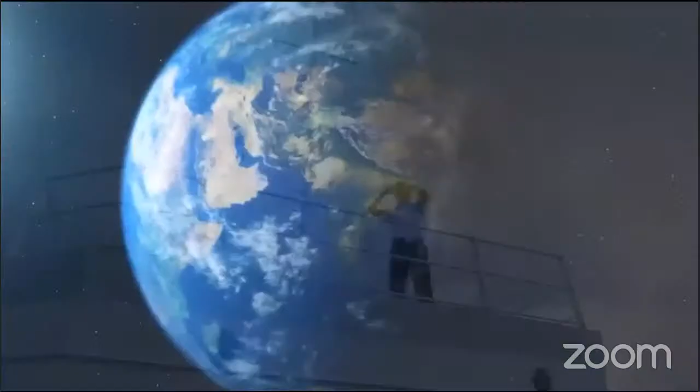The sea might be as violent as it can be, the water infinite, and the waves intimidating. But all this becomes insignificant when a mariner dons his uniform. Conquering the high seas is no mean feat. Only those with a mighty heart and a steely resolve can accomplish that. Such extraordinary seafarers are made in Tolani Maritime Institute, located in Induri at Talegaon near Pune.

The sprawling 100-acre campus is an endeavor by the Tolani Group with an illustrious tradition of establishing and managing higher education institutions. Dr. N.P. Tolani, Chairman, Tolani Group of Companies and founder of Tolani Maritime Institute, strongly believes in higher education and its advantages. He credits his father for encouraging him to provide higher education in the country. I got the bug of education from my father, and it has continued ever since.

Our vision at TMI is to be the preferred maritime education and training provider in the industry, meeting the highest global standards. This institute is one of the largest maritime educational centers, offering Grade 1 rated marine engineering and nautical science degree programs, postgraduate programs and other courses in collaboration with foreign universities as well. The degree courses are approved by the Directorate General of Shipping, Government of India, MLIT, Japan and MPA, Singapore.

The BTech Marine Engineering, BSc Nautical Science degrees and the Diploma in Nautical Science are presented by the esteemed Indian Maritime University. There are hosts of other short-term courses like Electro-Technical Officers course, Command and Control course, and other safety-related courses. At TMI, our focus is to achieve excellence in shipping and maritime techniques. But what makes this possible and what creates world-class mariners? It is the holistic impact of the state-of-the-art campus and the overall infrastructure that renders the Institute matchless.

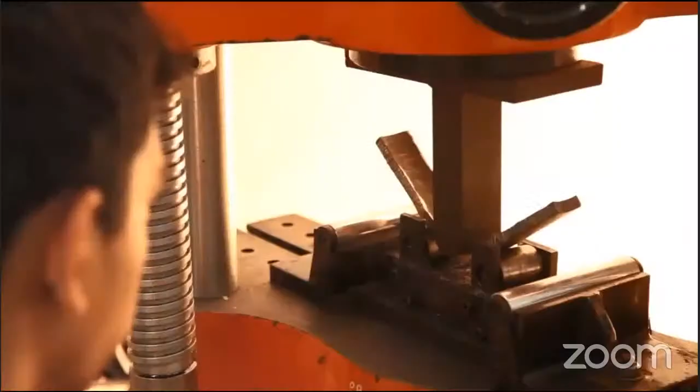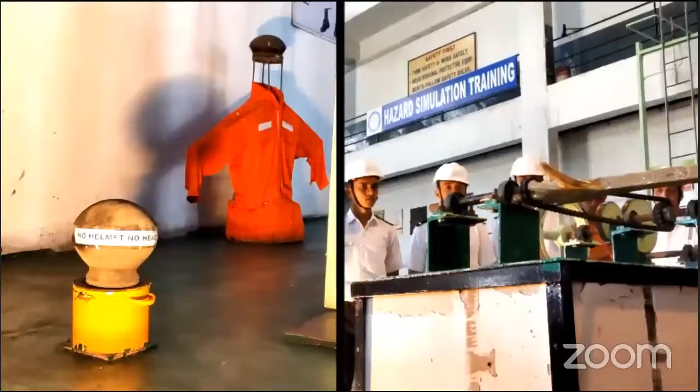This is an Equal Opportunity Institute. The students are offered merit and need-cum-merit scholarships worth over $160,000 per year. Additionally, many shipping companies also offer merit-based scholarships. As a student and an aspiring mariner, this is the most amazing and apt place I could have been. But the linking bridge between all these elements of the Institute and the students is the faculty.

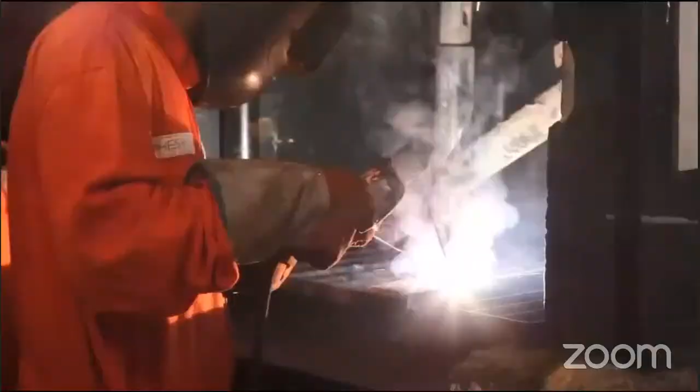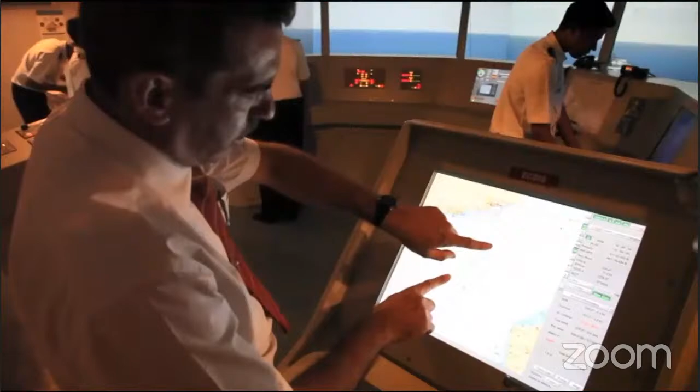The values that we imbibe here are attitude, skill and knowledge, that is ASK at TMI. These values along with safety come together to create successful mariners. The skilled and experienced faculty at Tolani Maritime Institute is the guiding light for the proud future mariners.

The courses we offer at TMI for the undergraduate programs allow the students to identify, explore, and understand areas where his or her true passion lies, the exciting profession of seafaring. The professional and qualified full-time faculty leaves no stone unturned to instill pride, integrity, determination, humbleness, and in-depth knowledge about shipping and maritime operations in the would-be marine officers. After all, it takes more than just the love for swimming to make you equal when the sea presents its worst.

TMI has a glorious legacy of training the brightest aspiring seafarers. But why do students go through these 4 years of grueling training? To tame the seas and for admiration, respect and honor which come with donning the uniform adorned with stars. It is a job worth toiling for. Some of these students go on to become the guardians of India's formidable coastline.

The innovative internship cum placements program at the Institute gives its students an edge over the others. The recruiting companies have no second thoughts on hiring students from the Institute. A majority of students enjoy permanent employment with some of the top-notch national and international shipping companies. I believe that this is where the bright future of shipping and maritime industry in India is assured.

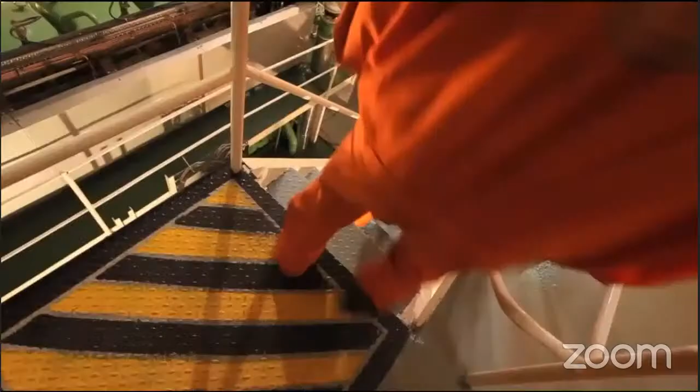The journey, though, definitely does not end here. It is still a long way to go, and they have to prove their mettle. The canvas is huge, the battle challenging. It has been rightly said that you can never cross the ocean unless you have the courage to lose sight of the shore. That will surely not be a tough task for graduates from this institute. They have the strong foundation of training at one of the best maritime institutes in India. Any ocean, any ship is easy to fathom when your alma mater is Tolani Maritime Institute.

Every single time we as cadets see glances of our campus, we start missing being there even more so. Truly, the rich legacy of our college, the foundational strength coming from the common culture followed at TMI, the culture of attitude, skill, and knowledge has made our institute stand out and a source of delivering quality marine officers.

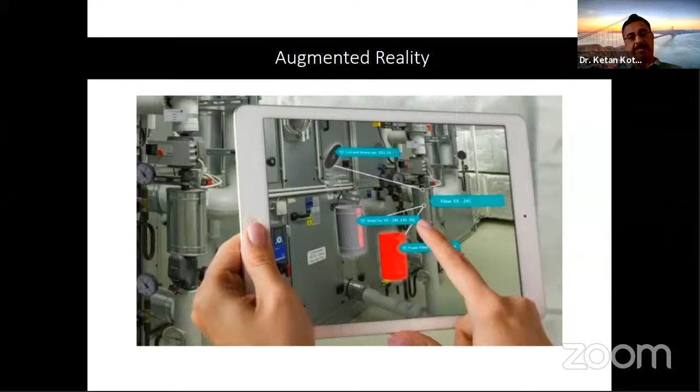Even people are talking about digital twin. Whatever you do in the plant, there is a simulation available, so that in simulation you can do a lot of control mechanism as well. For example, your ship is moving in the physical world, but there is a clone of that ship in a virtual world as well. And in the virtual world, you can do a lot of experimentation on that particular ship, and you can do some predictive maintenance or predictive analysis, so you can know a priori what is going to happen to your ship. So that is not difficult now, and that is an application of AI for digital twin, right? So I'm sure you will learn that maybe in the final year or some advanced courses in your BTech program as well.

Manufacturing, there's a huge usage. Once I was seeing the video of your institute, very, very impressive video. I could see that there is a lot of scope for predictive maintenance. Because your ship can go wrong, maybe because of wear and tear, and there are a lot of other possible problems. You can predict those problems a priori by putting sensors all across the ship and finding out that after 15 days, this particular problem is going to happen. So planned maintenance can be done. That is a huge advantage of doing so. I'm sure you will prevent disasters as well using that.

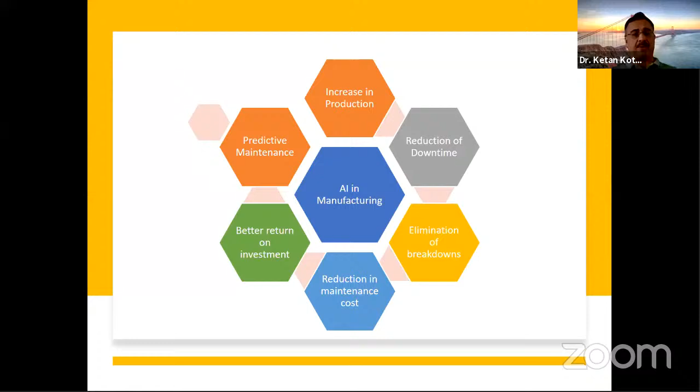So I see that there's a huge potential of applying AI for predictive maintenance in your ship or otherwise, right? And there are so many other directions in which you can apply AI to increase the production, to increase the supply chain. I think supply chain is also one of the important areas you may be working upon. So there also is a huge usage of AI. I was telling about generative design, that this particular design is indigenously produced by an AI algorithm by giving only the constraints, and it is an optimized design. It's found to be the most optimal design based on the constraints which are given, right? Or seat brackets are found automatically by the computer algorithms, which is an example of deep learning.

Healthcare, it is used in predictive analytics. Any particular disease before it happens, before it affects the person, or remaining useful life prediction. In a lot of places AI is used in healthcare, and it is the need of the day because doctors are less. I'm not telling that it's going to replace the healthcare workers, but it is definitely a helping hand to the doctors so that it can increase the efficiency. There are a lot of cases where very difficult surgeries are done by robots. A virtual nursing assistant can do the job of an actual nurse. At least 90% of the work can be done.

And a lot of other things in AI in healthcare as well. I'm sure everyone knows this particular picture, the most popular picture which Google has developed. By scanning the retina of a particular person, in just 5 seconds, you can find out 6 parameters of a particular person. His BMI, his sex, smoking habits, age, everything.

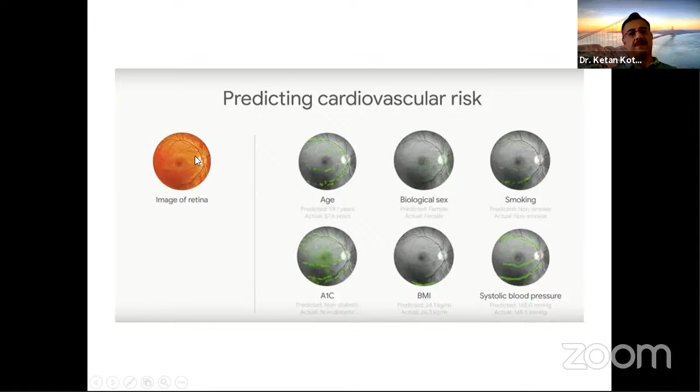By taking just a picture of the retina of any person in the world. So this particular project Google has developed in Bangalore by taking a lot of data of Indian people and then sold that particular machine back to Bangalore. And this can also predict the cardiovascular risk of a particular person by just scanning the retina. So that much is the power of convolutional neural networks. That's what I'm trying to tell.

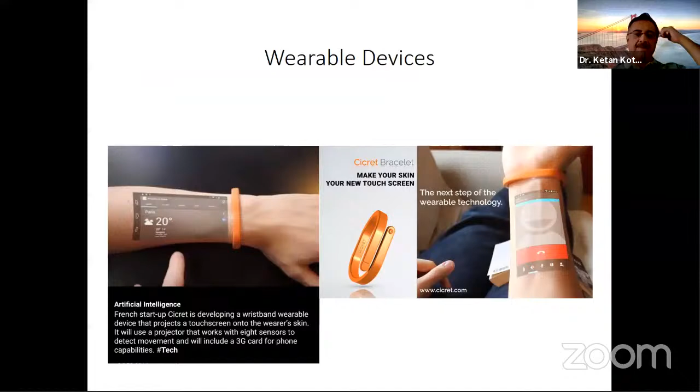I'm sure you know this car manufacturer, Porsche, and they are now into making robots which can do surgery as well. There is no exaggeration in the slides. Whatever is available right now, I am trying to tell that this much is the power of artificial intelligence. Wearable devices, I'm sure, are nothing new now, which definitely use a lot of AI.

In Stanford University, they have used AI to find out the solar flares. They predict it very well. This paper is published in Nature, and it's a very, very important finding from Stanford University.

There is a band which is developed, which is of AI, completely autonomous. If you are in another room, you can't find out that there are no human beings playing the band. And that's a test of AI, the Turing test, where you should not be able to find out that there are no human beings there. So that is also AI.

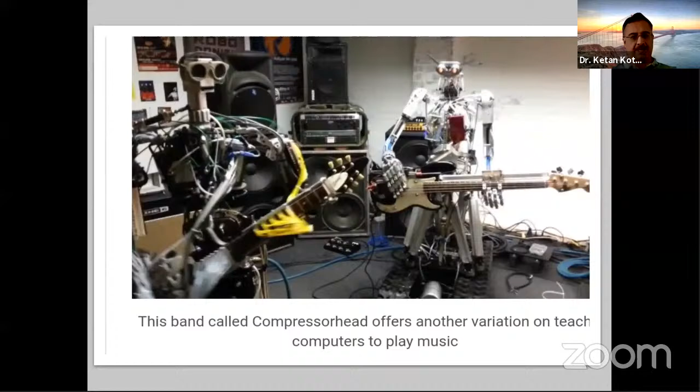So I'm not trying to give you the application per se for your domain, but a very general view of where AI has been used, so that you can think and find out where you want to use AI for a particular domain.

Agriculture, I gave an example of McDonald's, but in every facet of agriculture it has been used. Health monitoring of a particular crop, irrigation schedule, crop classification, crop yield, or disease detection. Just on a mobile phone, you move on a particular farm, take photographs and find out whether there is any disease coming up, so that you can use pesticides and preventive mechanisms for that particular disease. That is easily possible right now.

Readiness of the crop is possible. I have even seen that if there is a huge stack of wheat, you take a photograph and find out how many kgs of wheat are there. There is no need to weigh it. So that is easily possible. It's a very simple application of AI which is used for agriculture.

This is an indigenous work, and it is possible. You can try it also. You just search on Alex Graves. He's a student of Toronto University. He has developed this particular application, which is available to try as well. What is his application? Because he's a student, he has written a lot of notes, and he trained the AI algorithm on those particular notes.

After that, he speaks in front of a computer and the computer types, which is not difficult, which is very simple. Right now also we don't type for WhatsApp, you just speak. But the beauty here is the handwriting. These particular fonts are not available in any editor. This is his own handwriting, created by a computer. There is absolutely no exaggeration here. This handwriting style was totally captured by a deep learning algorithm.

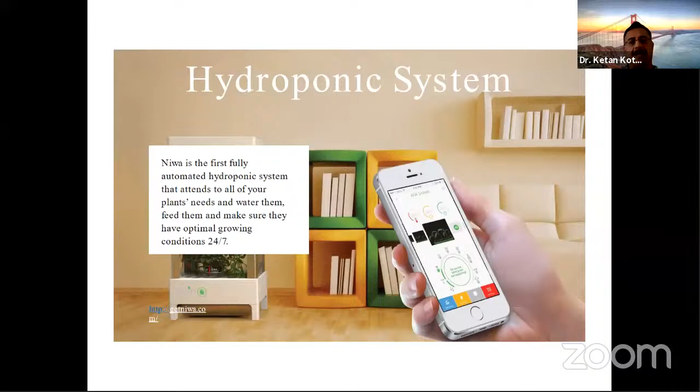Smart hydroponic system - if you have an indoor plant, you can completely control it using an AI algorithm. Smart sprinkler control - based on the soil, moisture, and weather conditions, your lawn will be kept green through continuous controlling done by the AI algorithm. Smart home security - I'm sure everyone knows this, and it is in high demand right now.

Very similar to Anil Kumble's Academy - if you want to learn this particular game, how to swing your bat, how fast, in which direction, and what kind of ball is coming, everything is taught and analyzed, and you can learn.

Smart sleep system - I'm sure everyone is using Fitbit to track how well you slept last night. Then there's the smart cooker, so you don't need to control how many whistles or the exact cooking time, it stops automatically. That is also an AI application.

Again, keeping with the tradition of Anil Kumble's cricket bat, if you want to learn tennis, this tennis racket comes with a lot of AI inside, and after you play the game, it analyzes your entire game and suggests that this is not the way you should have played, this is the better way to play. So it's completely automated using a cell phone and a smart racket.

Smart bike - it analyzes everything, we use it all the time now. Smart door lock, smart socks - it analyzes a lot of things about you once you walk or trek. And the last one is the smart t-shirt, which gives you your exercise schedule, calories burned, and so many other things.

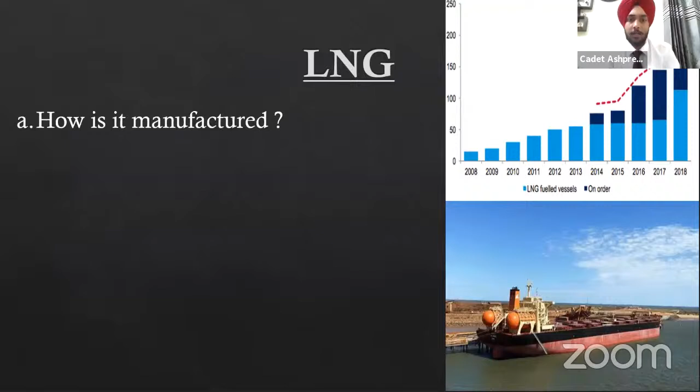Number one on the list is liquefied natural gas. How is it manufactured? It is manufactured by cooling the hydrocarbons to about minus 160 degrees Celsius, and then it is made useful for fuel consumption. But here's a limitation associated with it: the methane slip. When LNG is used as fuel and burned, a small amount of methane is emitted into the atmosphere.

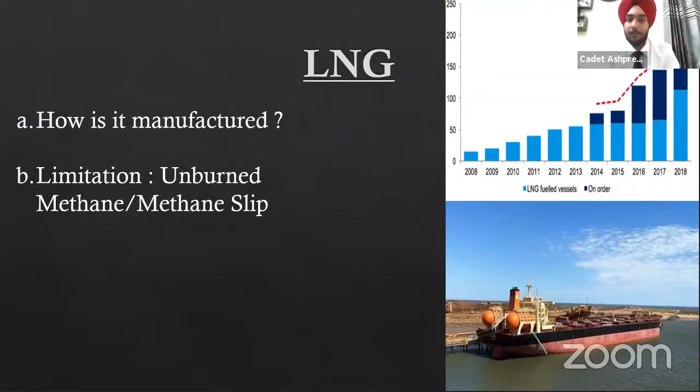This is very dangerous because as per the IMO report, a 151% increase in methane was seen when LNG fuel vessels started sailing. But as we know, the European Union has introduced a cap of 0.5%, also capped by the IMO. So this fuel has its advantage as no such sulfur emission is there by this fuel.

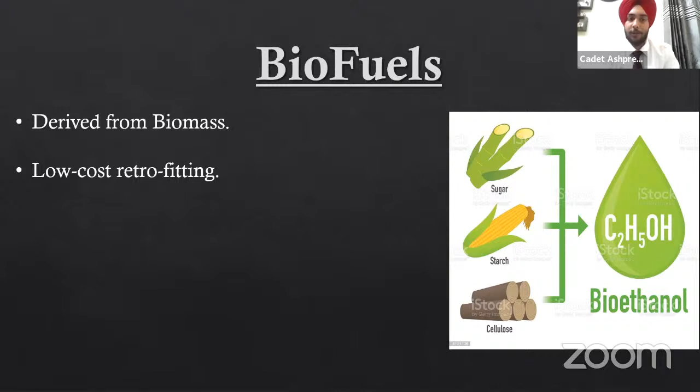The next on the list is biofuels. Biofuels, we all know, are derived from biomass. They require low cost retrofitting of engines. As we know LNG requires an expensive cost of retrofitting, but in biofuels we do not require so expensive a cost of retrofitting the engines.

The limitation associated is inflation and environment contamination. There's a debate that if biofuel is introduced in the marine industry, crops will be grown more for biofuel rather than for food, so there will be an increase in food prices. Also, crops will be grown with the help of fertilizers, so environment contamination through nitrogen is also evident. And the demand cannot be met fully—biofuels need hybridization, as only 20 to 30% of demand can be met through biofuels.

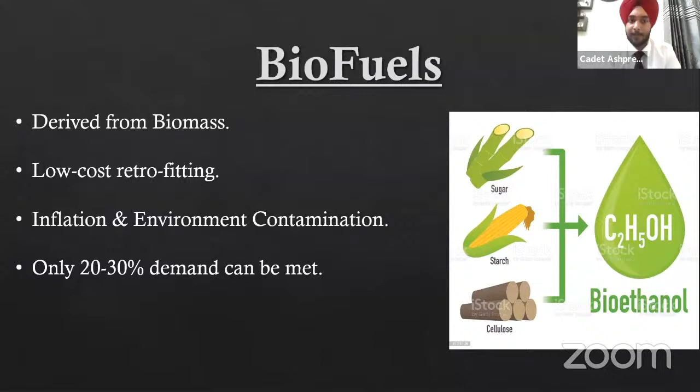The next one is ship electrification. I would say this is a zero emission fuel. This fuel is viable only for shorter transits. The reason behind this is electrification is either achieved by weighted batteries or by a thing known as fuel cells. If more and more weighted batteries are added to the ship, the cargo carrying capacity of the ship will get reduced, so ship owners will face losses. So this fuel is viable only for shorter transits.

Fuel cells are basically cells which convert liquefied hydrogen into electricity through electrochemical processes. Again, these fuel cells require hydrogen, and hydrogen is a gas with more volume, requiring large tanks for storage, again reducing the cargo carrying capacity of the ship. And also hydrogen is not readily available, so this fuel can be termed expensive too.

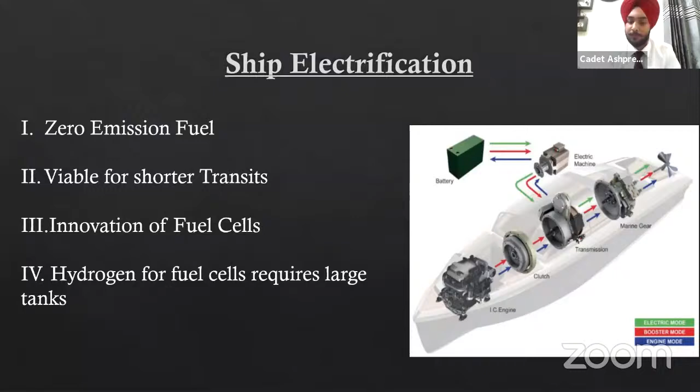The next one is nuclear propulsion, the most controversial fuel. There might be a doubt that this fuel can be used for manufacturing weapons, that it can be misused. But I must tell you that low enriched nuclear fuel is used, which is not at all fit for manufacturing weapons. This fuel produces massive energy, so it is viable for longer transits.

As you can see in this picture, this is an icebreaker ship. These ships have been utilizing this fuel since decades because they require massive energy for crushing through the ice, and they bunker after years. So nuclear propulsion is best fit for these ships.

We all know this fuel requires foolproof technology because gamma radiation leaks are disastrous. There have been incidents like the MV Mirai, in which a radiation leak occurred. And so many ports in the world are very apprehensive before calling nuclear fueled ships to their berths.

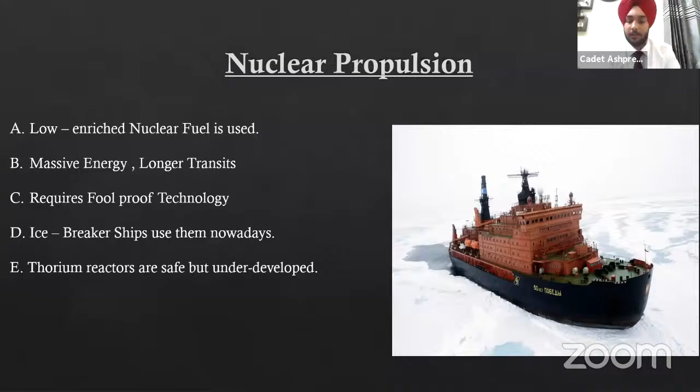And so our industry is also working towards thorium reactors. These are the reactors which are far safer than the uranium reactors because thorium reactors can do controlled reactions, and reactions can be controlled in these reactors to such a level that they can be stopped anytime. Also, the radioactive waste which is produced is short-lived and it is not so much as compared to the uranium reactors. The next one is the renewable energy.

Renewable energy, I would say it is technologically immature. As we all know, wind turbines are heavy, they are expensive, and also they produce a lot of noise. So I would say that the input is expensive, the equipment is expensive, and the output is less.

In the picture, you are seeing a Maersk ship, Maersk Pelican. An experiment of rotor sails was done on this ship. Rotor sails are basically long vertical axis mounted towers, and they utilize the Magnus effect to propel the ship. The Magnus effect is that a forward thrust is created, and the ship is propelled forward with the help of the wind. This experiment was successful and it also attracted international attention.

The next one, solar energy. It is very clear solar energy can produce very little output, so it is not at all viable to be used by these ships. And the last one on the list is the liquid and the gaseous fuels. These fuels are the fuels of hybridization. By this, I mean that none of these fuels can be used except in conjunction with the primary fuel. So hybridization is very necessary if the liquid and gaseous fuels are to be used to operate the ships.

Two of the fuels which I have identified as of now are liquefied petroleum gas and dimethyl ether. These are the two viable fuels that can be used by our industry. Dimethyl ether remains a bit unexplored, the reason being there are some limitations which have been identified. The first one, it has lower viscosity. Lower viscosity means it has a longer injection period.

Second one, it has lower combustion enthalpy. So there can be issues with leakage in the pipes, and also the lower modulus of elasticity. This can make us use greater compression pumps when we have to pump this fuel. So dimethyl ether needs a lot more exploration before being adopted as an alternative fuel.

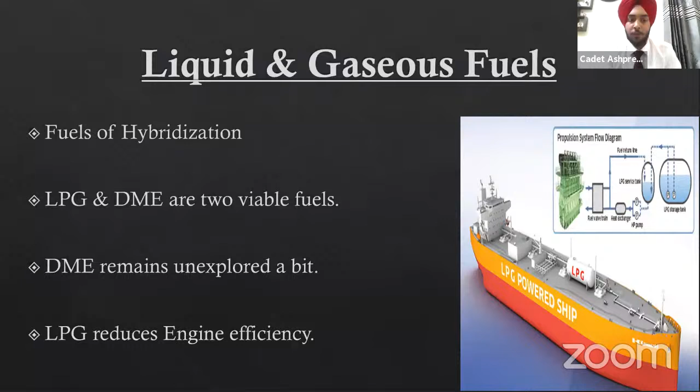And of course, LPG reduces engine efficiency. We all know in our cars also, LPG fuel when burnt leaves some residue. So this reduces engine efficiency. And now about the conclusion of the topic.

Cohesive international support. By this term, I mean that adoption of a new fuel is a tedious task. This fuel requires international support, the reason being only the developed countries, or only the countries which have emission control areas on their coastline or economic zones, are looking forward to these alternative fuels. But the international communities have to come in and also help the developing countries, because the merchant navy is a global profession.

So we have to... the countries or organizations like the UNFCCC, the organizations associated with the Paris Climate Change Agreement, they need to step in and support financially or by anything. This we need to support.

This is a 10 minutes reminder. This is a 10 minutes reminder for the presenter.

Continue. Hybridization is the need of the hour. I mean, without hybridization it cannot be achieved, because nuclear propulsion and liquefied natural gas were the only fuels which can be used without hybridization. All other fuels require hybridization because the demand cannot be met. And in my view, liquefied natural gas looks like the most viable alternative fuel.

With this, I mean that liquefied natural gas has been in use for about 10 years now. So many ships are using liquefied natural gas as their primary fuel. And so the cost of retrofitting, which was its limitation, is also being continuously reduced as more and more companies are stepping in to make LNG fueled engines.

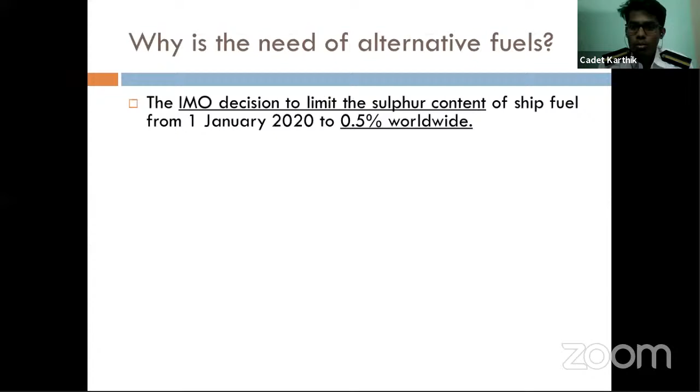So after all these advantages, what is it that makes the industry move towards alternative fuels? Let's see why there is the need for alternative fuels. First is the IMO decision to limit the sulfur content to 0.5% worldwide. Second is the recently adopted resolution to reduce greenhouse gases by 50%. This is adopted by IMO, and after reducing the SOx emission by bringing in regulation, there has been uptake of marine fuels such as MGO and MDO in the industry. But these fuels are low in sulfur content, but still are producing as much GHG, greenhouse gases.

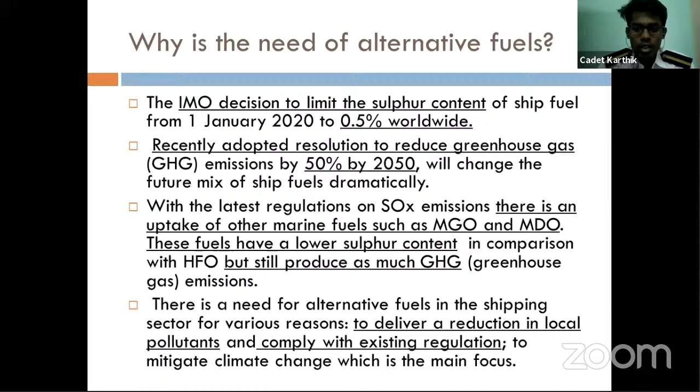And one more need for alternative fuel is to deliver a reduction in local pollutants and comply with the existing regulations. So now you know the need for alternative fuels is mainly to reduce the pollutants and comply with the existing regulations. So what is alternative fuel? Alternative fuel is a fuel which acts at least partly as a substitute for fossil oil sources, and which has the potential to contribute to decarbonization and enhance the environmental performance. It is not fully overtaking the fossil fuels, but can at least partly contribute to reducing emissions and to decarbonization. They include electricity, hydrogen, biofuels, synthetic paraffin, LNG, LPG, etc.

So come to the marine fuel challenges. What are the challenges we are facing with today's marine fuel? We have sulfur reductions. We know that most marine fuels have a high sulfur content, and IMO has recently come up with regulations and amendments to reduce the sulfur content from 3.5 to 0.5%. And talking about NOx reduction, NOx reduction is also a major challenge, although we can reduce it with systems like SCR and EGR systems. And CO2 reduction. CO2 is nothing but greenhouse gases. IMO estimates that it may rise by 50 to 250% by the year 2050 if no actions are taken.

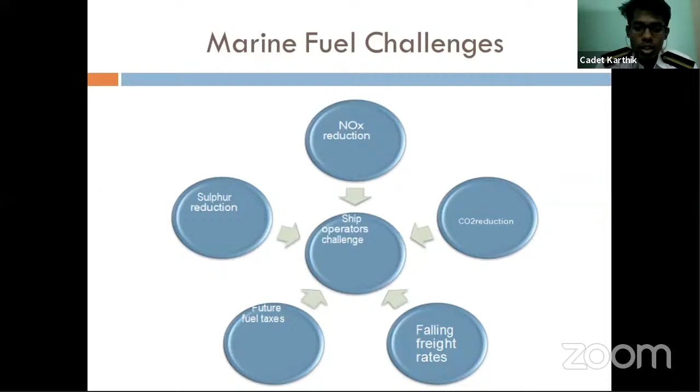Talking about future fuel taxes, as we know, HFO and other marine fuels are fossil fuels, and they can deplete over the years. So their taxes and prices may increase with the reduction of their reserves in the world. And falling freight rates. Falling freight rates are a major headache for ship owners, because demand for goods traveling by shipping is going to increase, but at the same time fuel prices will also increase. So there will be a great loss to the ship owners.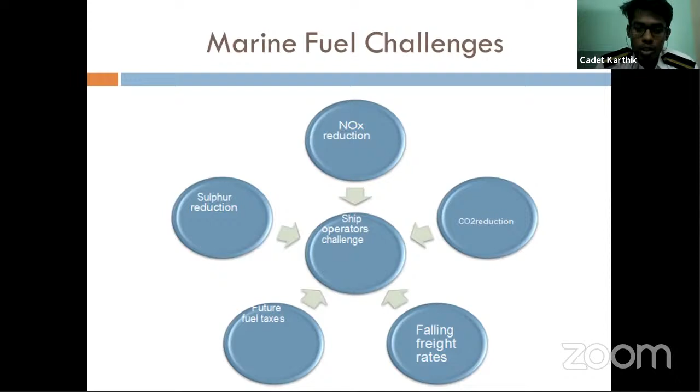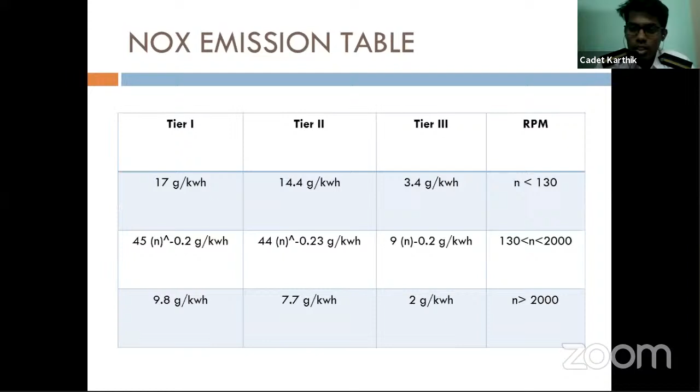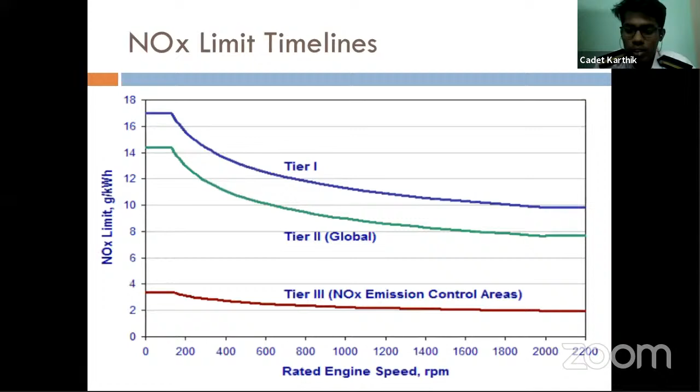New technologies. Among the proposed alternative fuels for shipping, DNVGL has identified LNG, LPG, methanol, biofuel, and hydrogen fuel as the most promising solutions, and they can be said to be replacements as alternative fuels. Fuel cell systems for ships are under development, but will take time to reach a level of maturity sufficient for substituting main engines.

In order to be an alternative fuel, it should complete these following demands. So for a marine fuel to be a fuel of the future, it needs to comply with the fuel triangle. So this is a fuel triangle given by DNVGL. So it must comply with high energy density. So a fuel must have a high energy density.

The energy density of alternate fuel will need to be comparable with the existing marine fuels. The crucial element with regards to the energy density is the energy content per volume. If said energy content is smaller than the energy content of current marine fuels, cargo capacity will have to be reduced as more space will be needed for fuel storage.

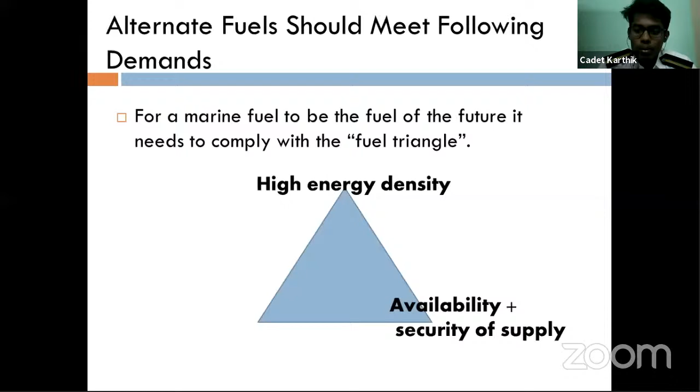Second is availability plus security of supply. So it is important that alternate fuels are easily available and they are easily supplied from one place to another. Because shipping is a worldwide industry, it should also be available worldwide. So proper infrastructure has to be built for that availability, and the fuel should be GHG neutral.

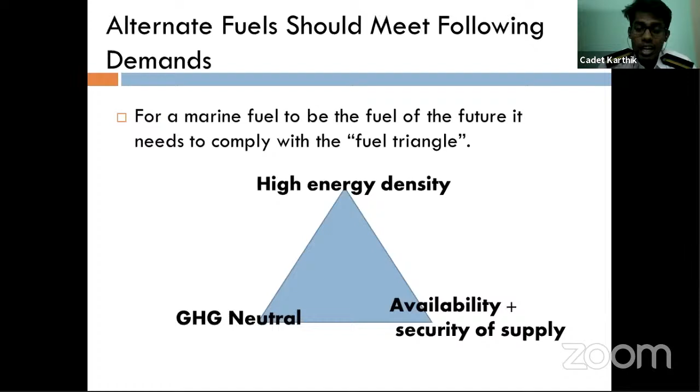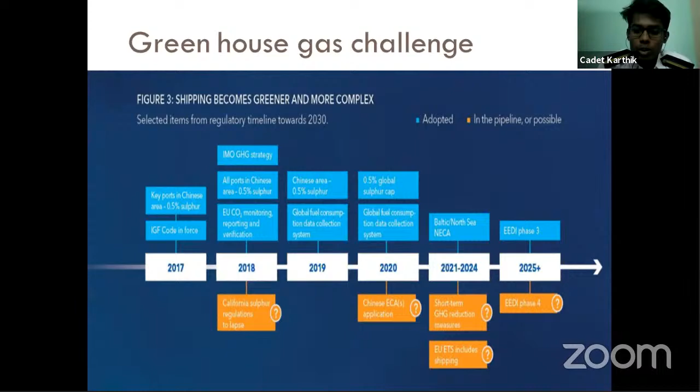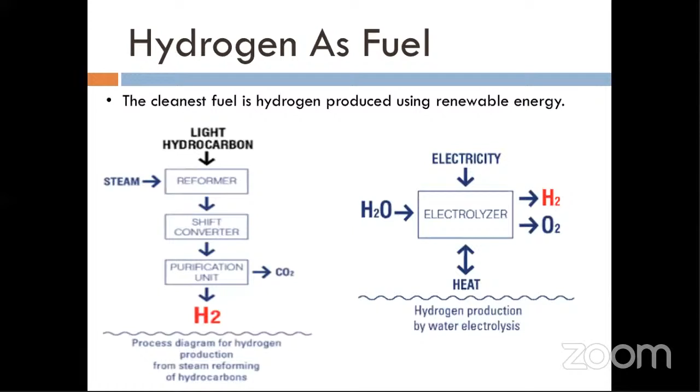This is the production, and the left hand side is the SMR method, and it is somewhat cheaper than the other methods. And the second one is the greener method, which only gives H2 and O2. But you can see on the left side it also produces CO2.

The two types of hydrogen use on ships need to be considered. Hydrogen dual fuel internal combustion engines can burn hydrogen with very low GHG emissions, and another one is fuel cell systems, which on the other hand use an electrochemical reaction to generate electricity. The efficiency of fuel cells is relatively high, at around 45%, compared to internal combustion engines.

Talking about the availability, it scores relatively well for hydrogen. A global supply network for hydrogen is present, but for worldwide availability, investments will be needed in renewable and hydrogen production infrastructures. But its disadvantage is very low energy density, so it requires large storage volumes to come into international deep sea shipping.

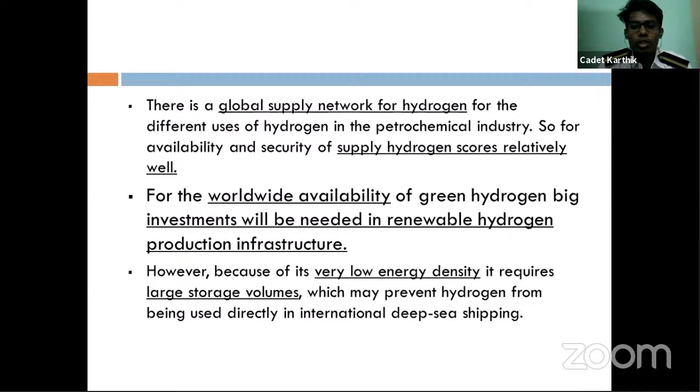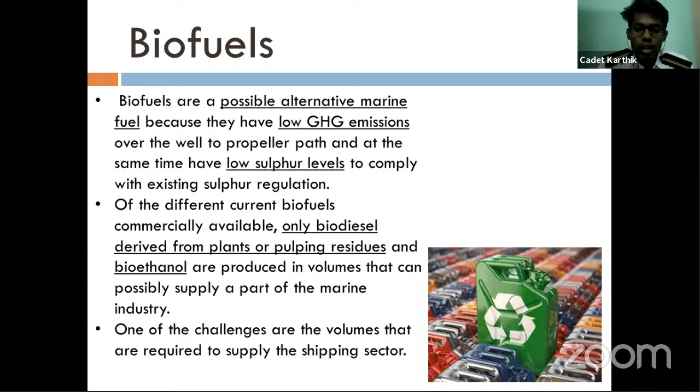Biofuels can be said to be a possible alternative marine fuel. They have low GHG emissions and low sulfur levels. There are a list of biofuels in the industry, but only biodiesel derived from plants or pulping residues and bioethanol are produced in volumes that can supply the marine industries. One of the challenges is the volume required, because a large amount of volume is needed to power the ships. Advantages are low SOx emission, safe to use, environment friendly, commercially available, cost competitive, marine is certified to burn biodiesel.

Your time is up. Your time is up. 12 minutes are passed by. Okay. So should I stop?

Please conclude. Okay. Conclusion is that there is no fuel that complies with the existing regulations on local pollutants, at the same time delivers a big reduction in greenhouse gas emissions, and is economically viable. LNG works perfect for existing regulation on local pollutants, but is not a low GHG fuel. Biofuel shows potential, but only if actual savings are realized, like fertilizer use needs to be accounted for.

Hydrogen, there is a barrier on transport and storage. Significant efforts will be required first to demonstrate applicability in practice and subsequently to be scaled up to the industrial level when talking about long-term lifetimes of ship and fuel supply infrastructure. Thank you.

Okay, thank you. This has taken 12 minutes and 52 seconds. 12 minutes and 52 seconds. Okay. Thank you, Mr. Karthik. Okay, you have done a good job. You have taken review of so many alternative fuels. Okay, so based on your presentation, first of all, I'll request judges to ask a few questions.

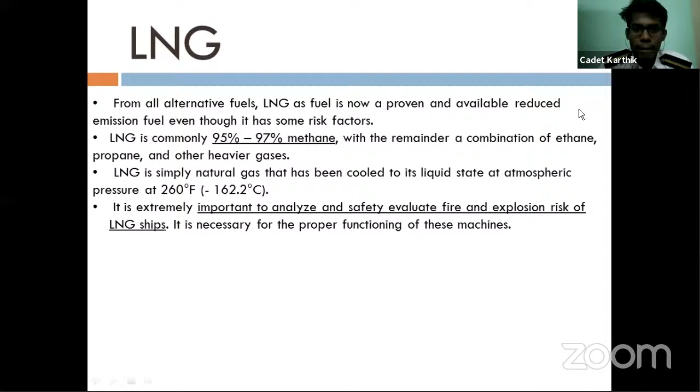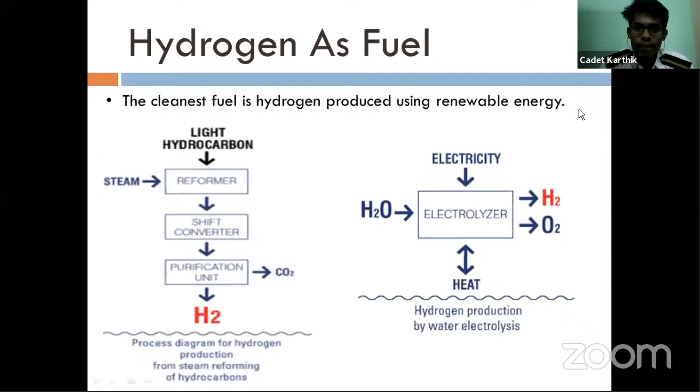So does it include even methane slip? You had mentioned even with methane slip, the total LNG is much better. Its emissions are much less, even with whatever methane slip is happening. You mentioned that in the paper. Do you remember that? Do you agree to that?

Yes, sir. Methane slip is actually a greenhouse gas. It is the unburned methane which is released in the atmosphere, but it is actually a greenhouse gas and has a global warming potential 25 times higher than CO2. So I think, according to the emissions, it is comparatively less than HFO, and it can be used as an alternative. Good answer. Thank you.

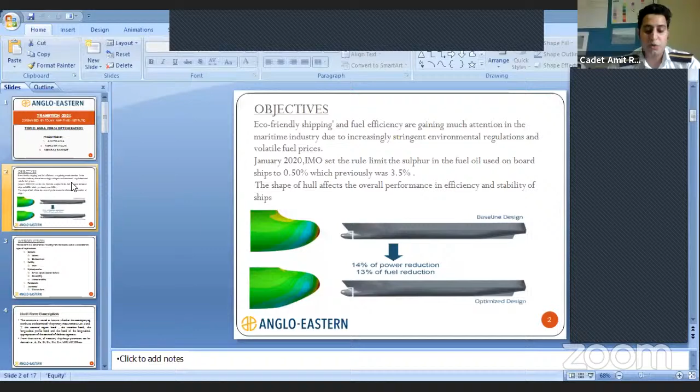Hull is the main structural member of the ship. As suitable material is the essential component of hull formation, proper design is even more important. Eco-friendly shipping and fuel efficiency are gaining much attention in the maritime industry due to increasingly stringent environmental regulations. As of January 2020, IMO set a limit on sulfur content in fuel oil used on board ship at 0.50%, which previously was 3.5%.

Here we see a picture of the baseline design and optimized design. On the right side picture, there is not much difference. If we focus on the left side colored picture, the yellow part of the above picture is more prominent compared to the one below.

The yellow part indicates the pressure point. By just reducing this pressure point, we get 14% power reduction and 13% fuel reduction.

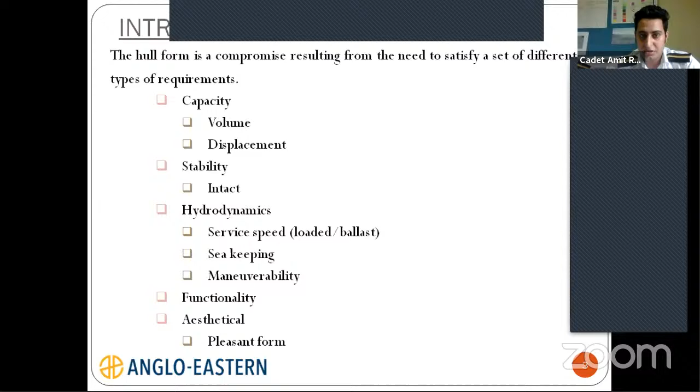Introduction: what requirements we need to satisfy for optimum hull designing - that is capacity, volume displacement, stability, hydrodynamics, service speed, seakeeping, maneuverability, functionality, and pleasing forms.

Hull form description: the various parameters we need to consider while designing an optimum hull are displacement, block coefficient, prismatic coefficient, midship coefficient, volumetric prismatic coefficient, water plane coefficient, and longitudinal center of buoyancy, where LCF is the longitudinal center of flotation, and KB is the distance between the center of buoyancy and the keel.

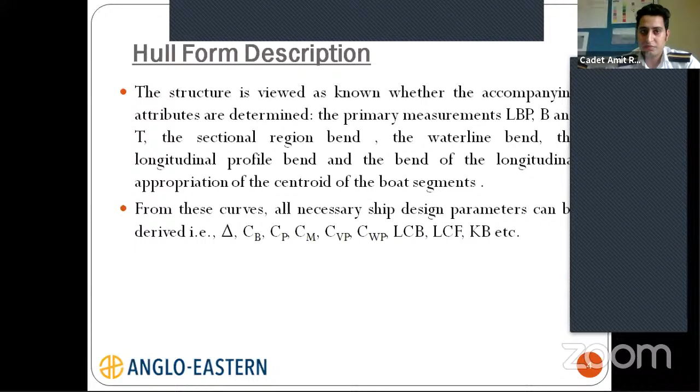Next, hull form variants - we have three hull form variants that we need to define for proper designing of the hull: LCB studies, forward body studies, and aft body studies. LCB study indicates the volume distribution - how much volume we have in the forward part and the aft part.

Next, study of the optimum position. As I said earlier, LCB plays an important role in resistance. It indicates how much volume we have in the forward and aft part. For better design, if the forward portion has a major effect on resistance, we should adjust the LCB accordingly, which we'll see in the next slide.

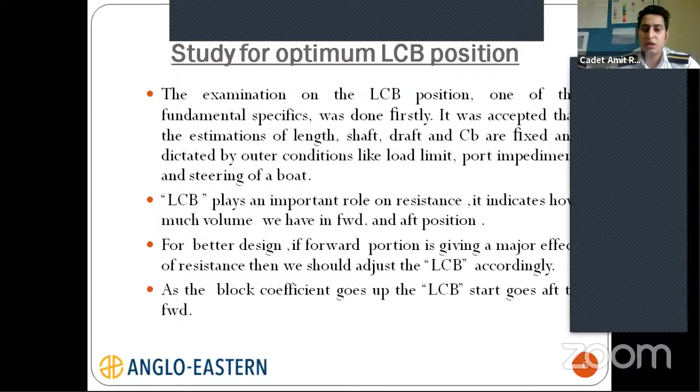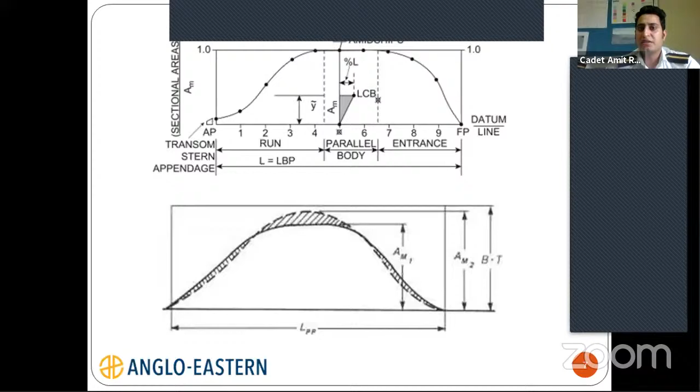As the block coefficient goes up, LCB moves off towards forward. Here is a slide which clearly shows that LCB is not exactly at the center - it is slightly apart towards the forward part.

Next, study of the optimum forward body design. We have three body shapes: V shape, U shape, and bulb shape, each for different application purposes. In V shape, we get a lower block coefficient, less forward resistance, a lesser angle of entrance, and less drag.

So V shapes are generally used where we need more speed, generally in finer shapes. U shapes, compared to V shapes, give a higher block coefficient, in the range of about 0.8 to 0.850.

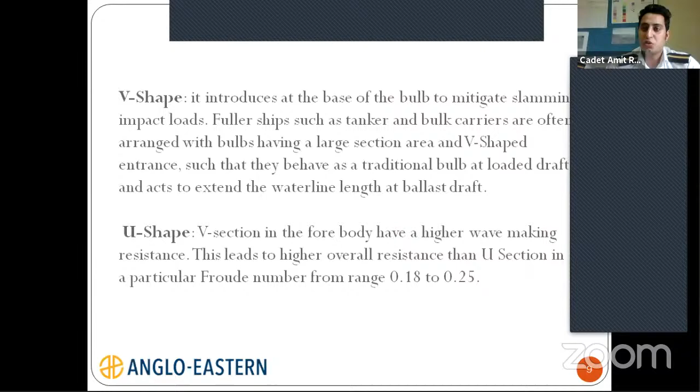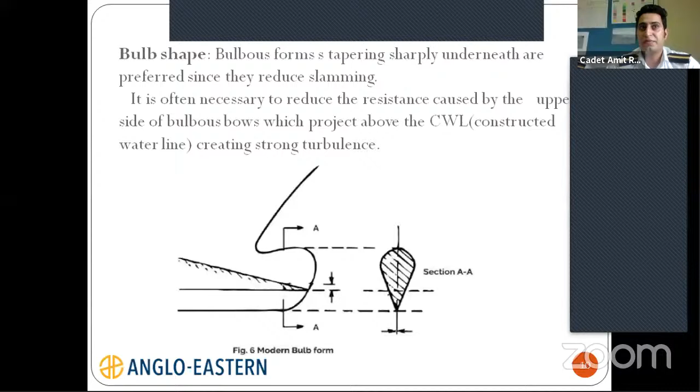Next we have the bulb shape, which can be said to be a composition of the V and U shape. It is a medium shape where we get a block coefficient of about 0.5 to 0.530.

Next is the forward body shape. When we design a forward body shape, considering an ideal fluid, whenever a body moves in an ideal fluid, a pressure force develops around the body that is normal to the body surface.

Next is the study for the optimum aft body design. Our main aim is to have minimum wave resistance. For that, we considered not just resistance alone - if we design a good aft body design, we won't have a penalty on resistance.

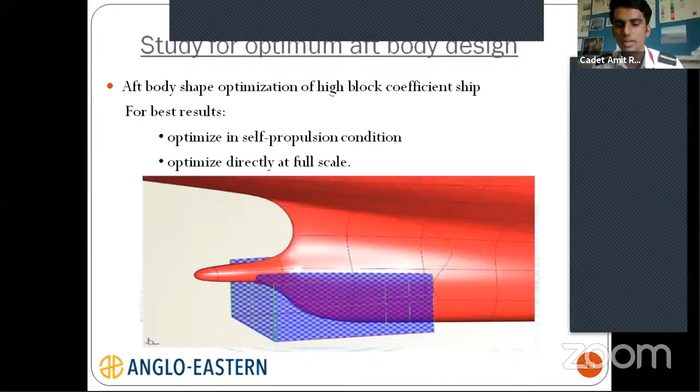And of course, if it is a bad design, there will be a bad penalty on resistance. So aft body considering flow consideration says that the flow on the propeller is good and it doesn't have any vibratory forces. That is the main concern, like when it can produce less turbulence, meaning the area between the propeller and the outer shell above the propeller gives us good propulsive efficiency. So that is covered in this slide.

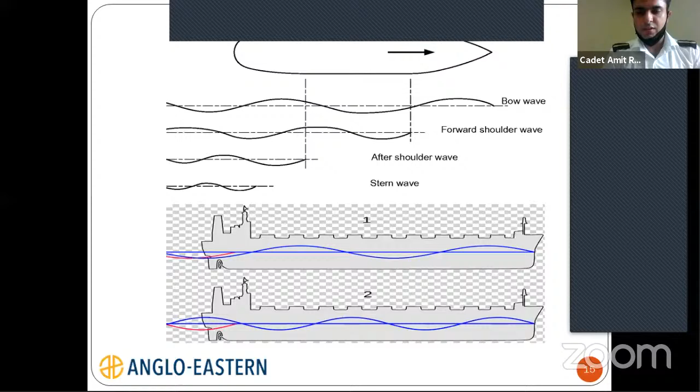In conclusion, the method of optimizing hull form with respect to hydrodynamic performance, which we discussed earlier, the hull form procedure for minimum resistance that I developed is presented here.

The optimum range of LCB is decided basically by considering what type of resistance we are getting. In fact, if we see the front part of the ship, we definitely get more speed, but parallelly we get more resistance at the shoulder part. So we design a ship where we get less resistance at the shoulder part, while parallelly getting more speed. Here I mentioned the optimum range of LCB for forebody design and afterbody design to make it economically favorable.

The various wave factors that I discussed earlier create different negative pressure zones at different parts, like the front part, front shoulder, and aft shoulder. We consider this so that less turbulence is generated, and with less turbulence, we definitely have lesser resistance.

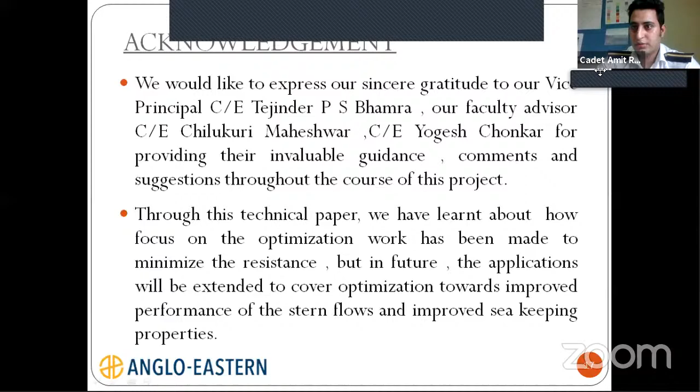Okay, so thank you, Cadet Amit. So you have taken a lot of effort collecting information about the different parameters and even design of hull and all that, and how it will contribute to the reduction in emission and all that. So congratulations to you.

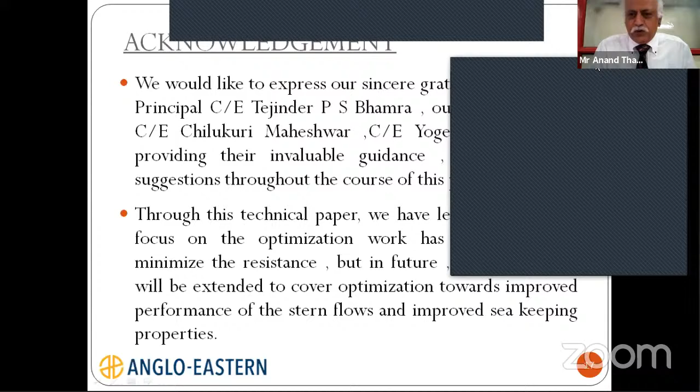Well, congratulations to all of you for a very good presentation. Although the handout which I had got is totally different from what you presented here. Earlier I had just gone through your handout, which was saying only a few parts that are the same, but otherwise most of it is different. The handout was not that interesting, but what you presented just now is definitely more precise and to the point, and more interesting also. So I think you've done a good job. Thank you, sir.

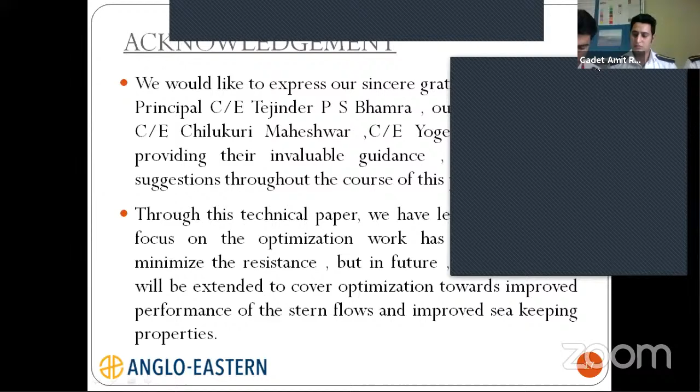Is this Froude number used to define what kind of vessel it is? Basically, sir, tanker vessel or a generally finer vessel where we have less block coefficient. No, I'm talking about Froude number. You mentioned some range there, so I'm interested in knowing if any specific range exists for slow vessel, high speed vessel, or medium speed vessel, and how it affects the wave making resistance, because you talked about wave making resistance patterns also.

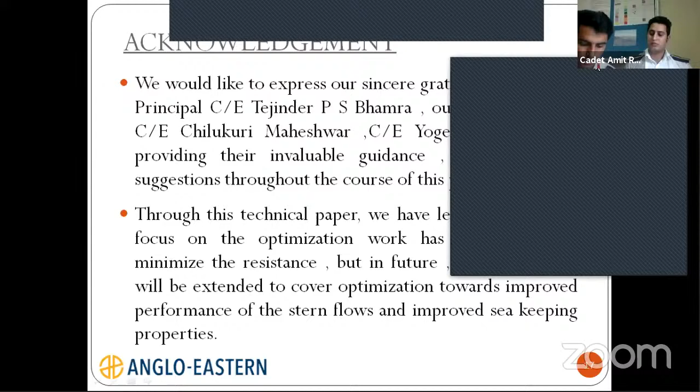So for a destroyer, the value is 0.45, depending on speed and performance, and for a large tanker it's 0.85, for a fuller hull. Is it 0.85 you said? Yes, sir, for large tanker. I'm afraid that is wrong. One comment on wave making resistance for different Froude numbers. Sorry sir, at this moment we are not able to answer this question, we need to do some research. Okay, thank you, thanks a lot.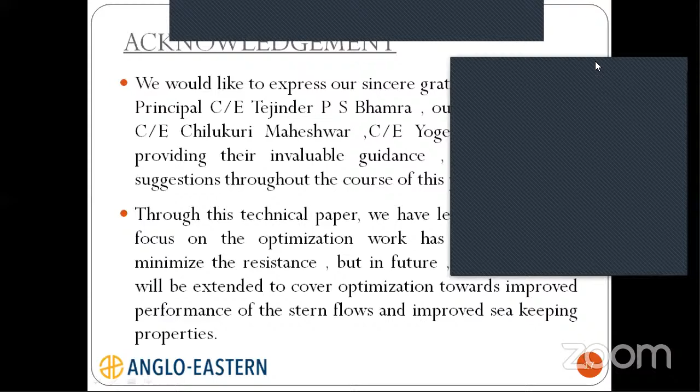Anybody else? Some time is there. Not a relevant question, Amit, but all three of you are sitting at one place - are you at the institution, Anglo Eastern, or at home? No sir, we are at institution. Okay. Are you maintaining social distancing? Yes sir, yes sir, we are maintaining. That is very much required in this kind of situation. Definitely.

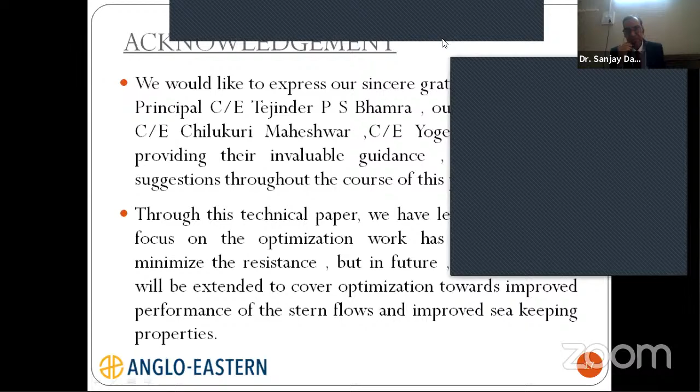So I will give the summary of the session. The first author was from TMI, Mr. Ashpreet Singh, and the topic of the paper was alternative fuel, predicted issues and solutions. He took 11.37 seconds. Then the second presenter,

Mr. Karthik and Shitanjal Srivastav from HIMT Chennai. They took around 12.50 seconds for their presentation. And the last presentation of the session was by Mr. Amit Raina, Abhijit Pillai, and Abhiraj Ranaut from Anglo-Eastern Karjat. The topic was hull form optimization, and they took 9.23 seconds.